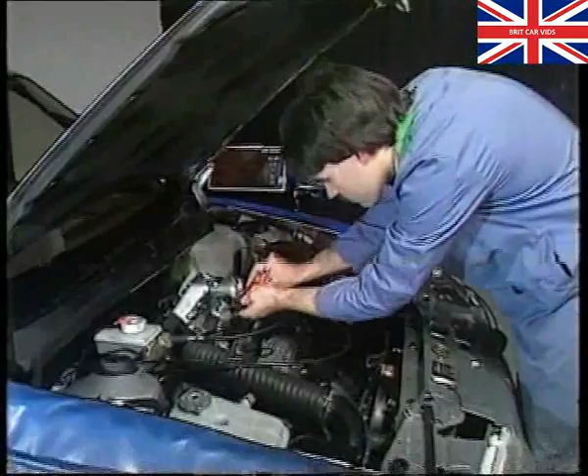For an orchestra to give an outstanding performance, each musical instrument must be tuned to perfection. A technician working with an engine must give the same care and attention to each individual component. Only when every part is precisely in tune can they combine to strike the right chord for a perfect performance.

Performance is important in any car, but even more so for turbos. Turbocharging gives the ideal balance, performance plus economy. It increases power without the additional cost or weight of a larger engine. Racing cars as far back as the 1920s used superchargers, from which the turbocharger has evolved.

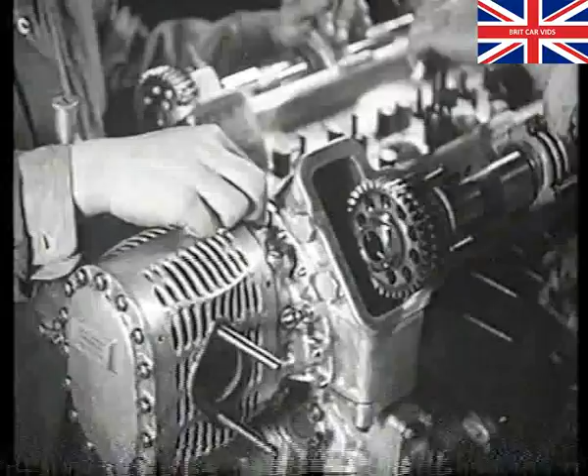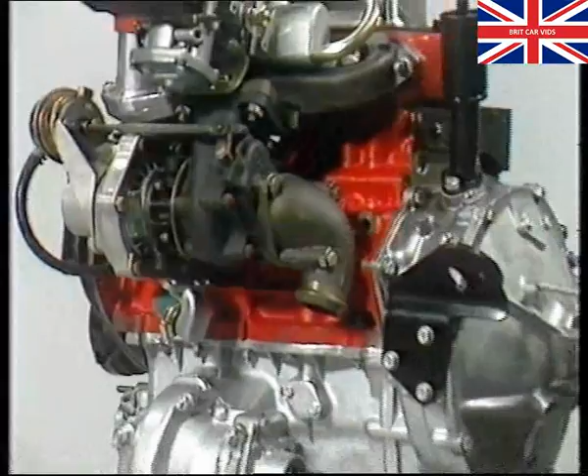Superchargers improve performance by blowing the air-fuel mixture into the cylinders and are usually belt-driven from the crankshaft. However, they have one major disadvantage. They absorb power from the engine to drive them. Modern turbochargers perform a similar function, but have the advantage of being driven by the waste exhaust gases. So the turbocharger is effectively providing more engine power without demanding any in return.

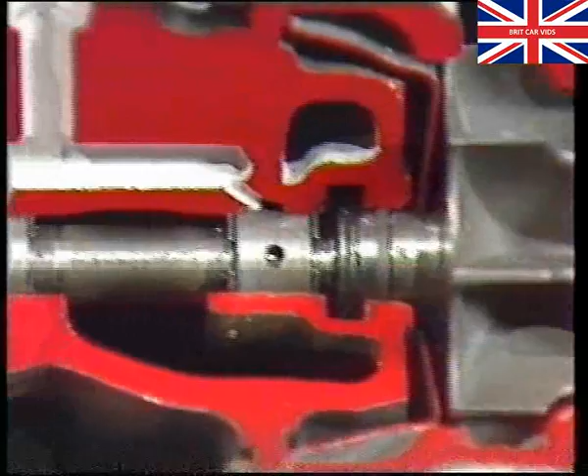The turbocharger is bolted to the exhaust manifold. At its heart is the shaft assembly. This has a turbine wheel on one end and a compressor wheel on the other. The shaft assembly is enclosed in a body which comprises a turbine housing, a bearing or center housing, and a compressor housing.

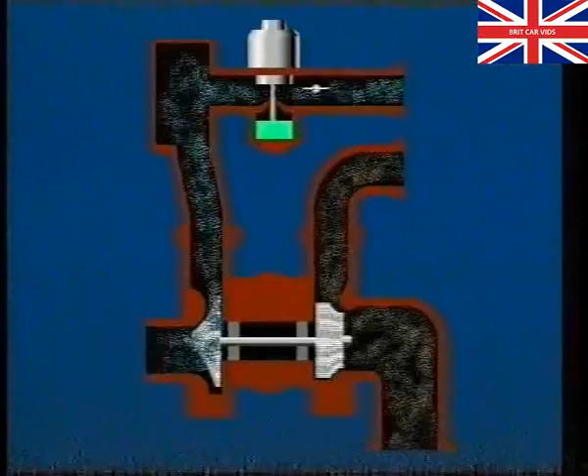Exhaust gases enter the turbine housing from the manifold, powering the turbine, which spins the compressor wheel. This draws air from the filter and blows it under pressure through the carburetor and into the engine. As engine speed increases, the turbine spins faster, increasing pressure. The higher the pressure, the quicker the cylinder is filled, producing more power. This compression of intake air is known as boost pressure.

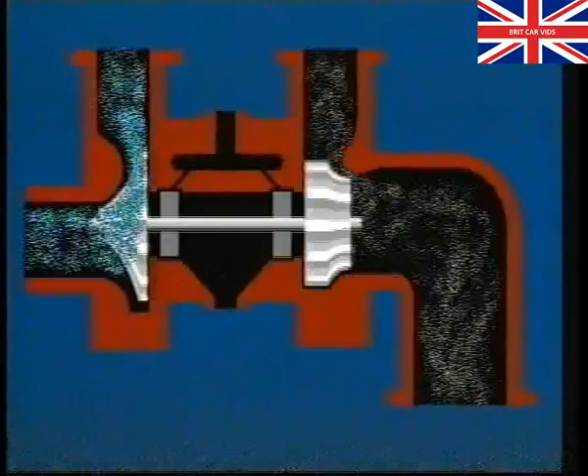A high volume of oil is fed from the engine lubrication system to the center housing, then through drilled passages to the bearings. An adequate supply is essential, as the shaft assembly can rotate at up to 130,000 revs per minute. If the oil supply was to fail, the result would be immediate overheating, which would destroy the remaining oil and result in bearing failure.

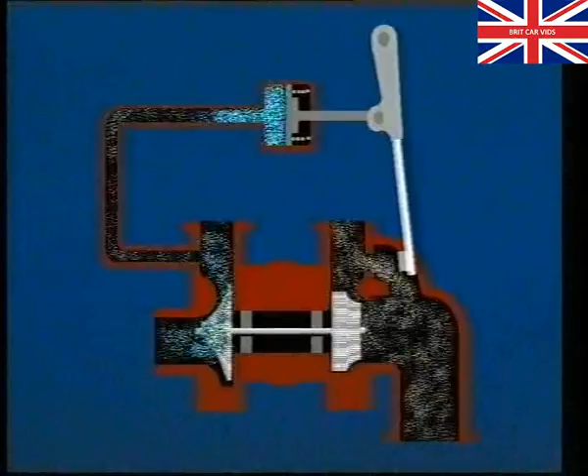A wastegate, which acts as a safety valve, is operated by a diaphragm and pushrod. This controls maximum boost pressure, which could otherwise damage the engine through over-revving. When boost pressure reaches a predetermined value, it will act on the diaphragm, opening the wastegate via the pushrod. This allows the exhaust gases to bypass the turbine and reduces boost pressure.

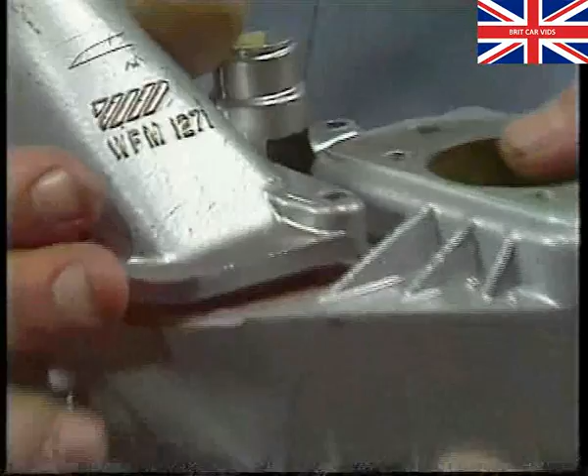If the wastegate valve is jammed shut, a relief valve in the plenum chamber will dump the excess pressure to atmosphere, preventing damage to the engine. On the Montego turbo, boost pressure is limited to 10 pounds per square inch by a purely mechanical wastegate. The Metro turbo has basically the same wastegate operation, but incorporates an electronic control system.

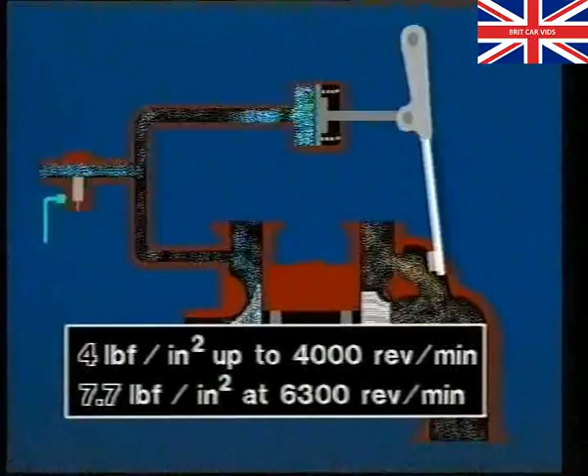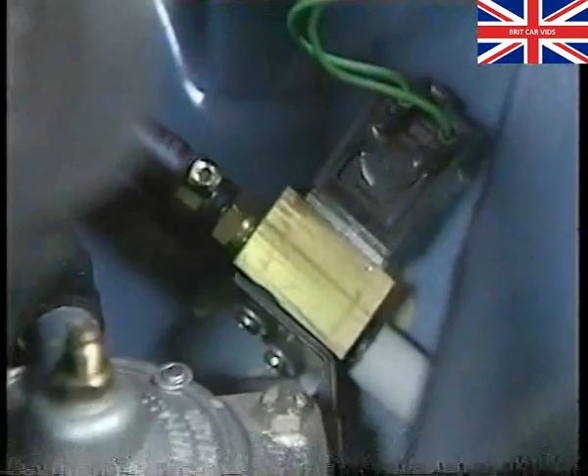A solenoid valve, controlled by an ECU, limits boost pressure to 4 pounds per square inch up to 4,000 revs per minute, increasing to 7.7 pounds per square inch at 6,300 revs per minute. This valve, mounted on the left-hand side of the bulkhead, regulates turbo boost by reducing the amount of boost pressure acting on the wastegate diaphragm.

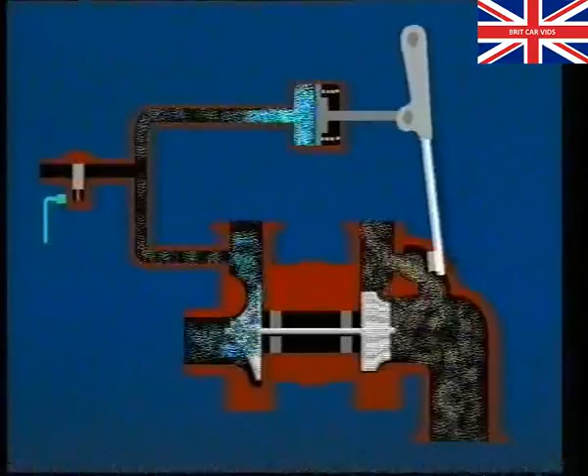The valve can open and close up to 12 times a second, depending on engine speed. If the electrical supply fails, the valve will remain closed, limiting boost pressure to 4 pounds per square inch. Because boost pressure rather than vacuum can be present in the inlet manifold, the crankcase ventilation system is unique.

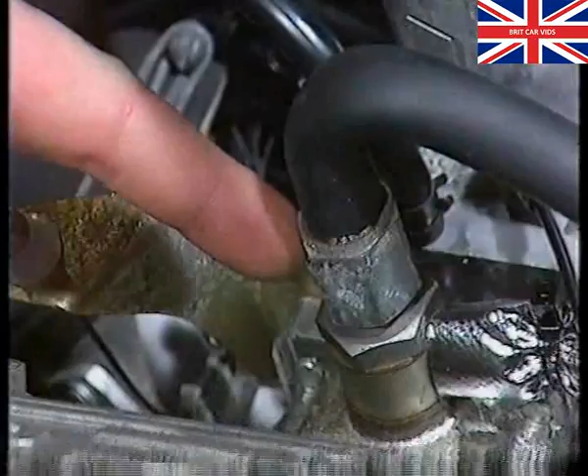Ventilation is dependent on two valves, one in the inlet manifold and one in the breather hoses between the engine and air filter. During overrun, or at idle, when inlet manifold depression is high, crankcase fumes are drawn through both these valves. As engine speed increases, boost pressure closes the manifold valve to prevent the crankcase being pressurized. The fumes are then drawn in through the regulator valve and nozzle, located in the base of the air cleaner.

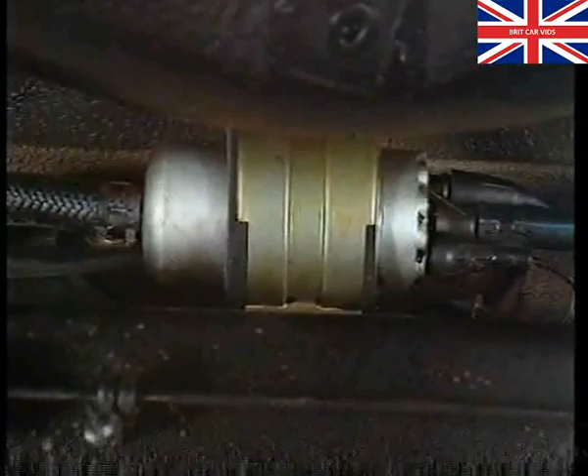The fuel systems fitted to both the Maestro and Montego are of the high-pressure recirculating type. During cranking, the fuel pump receives power from the starter solenoid. Whilst the engine is running, the pump is fed current via the oil pressure switch. If the oil pressure drops or the engine should stall, the fuel pump will switch off.

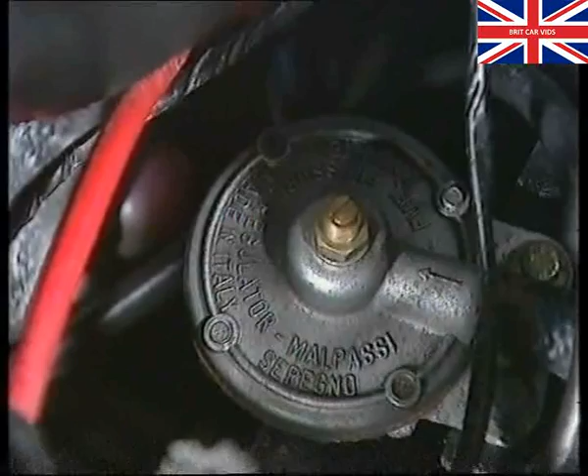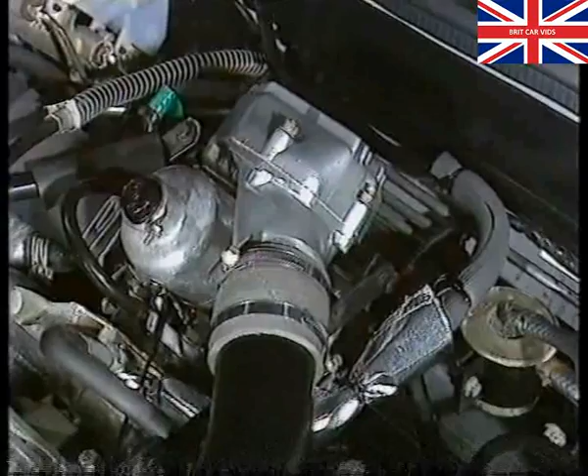Fuel pressure is controlled by a regulator. This is influenced by a sensing hose connected to the plenum chamber. As turbo boost pressure rises, fuel pressure will also rise, to ensure it's always 4 pounds per square inch above boost pressure. This means fuel can enter the pressurized float chamber at all times.

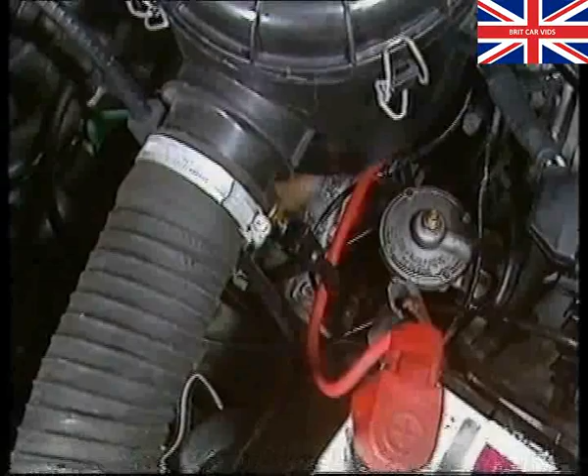Pressure regulators are preset at the factory via this adjusting screw, which must not be tampered with. A wrongly adjusted regulator can upset the fine balance between fuel line and float chamber pressure.

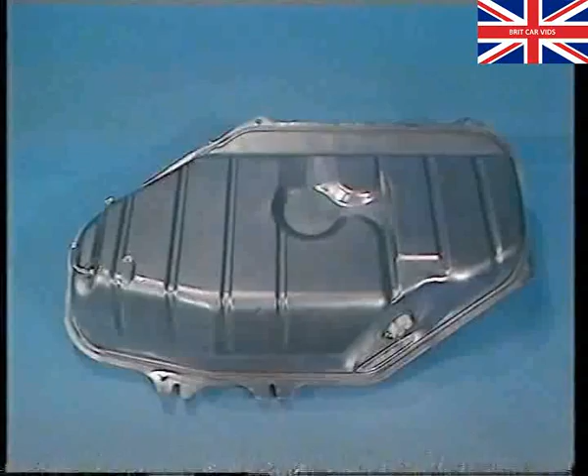In the Montego fuel system, the fuel tank contains a swirl pot. Inside this is the fuel pipe pickup strainer. The action of the swirl pot prevents air entering the fuel lines when the fuel tank levels are low.

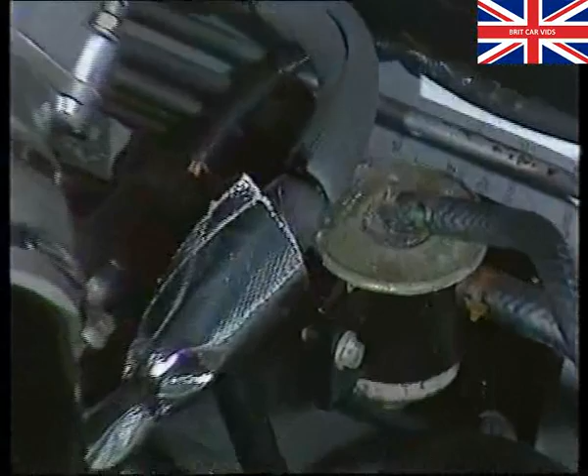A vapor separator on the bulkhead prevents aerated fuel entering the carburetor by means of a fine gauze filter. The air-free fuel then flows via the top outlet to the carburetor. Any aerated fuel is directed through the bottom outlet to the pressure regulator and back to the tank.

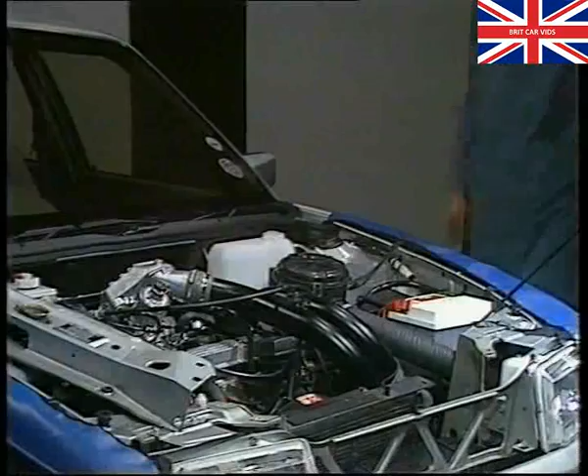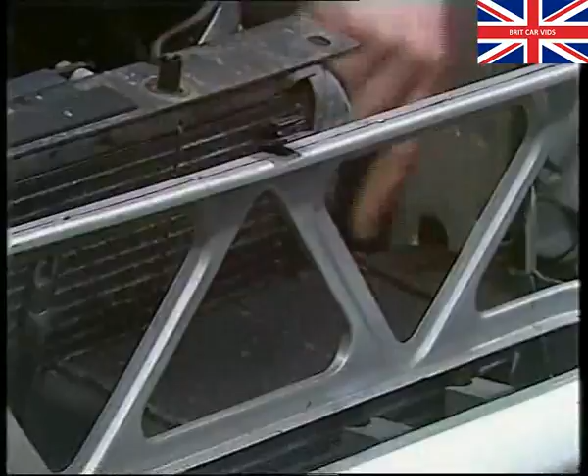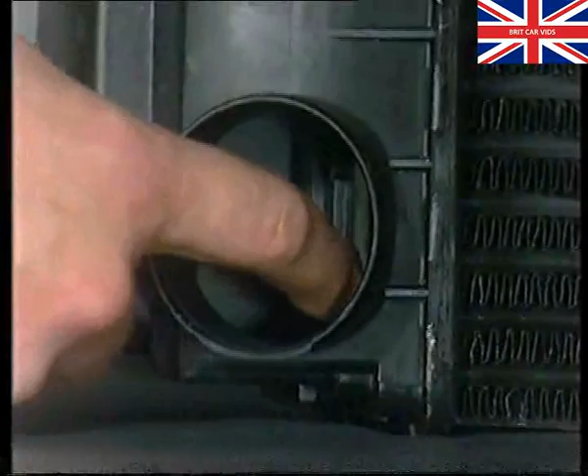The Montego turbo has an intercooler to cool the air after leaving the turbocharger and before entering the engine. This increases the density of the air. When intake air temperature rises above 45 degrees Celsius, a spring-assisted flap in the intercooler is opened by the waxstat, routing the air through the intercooler to the engine.

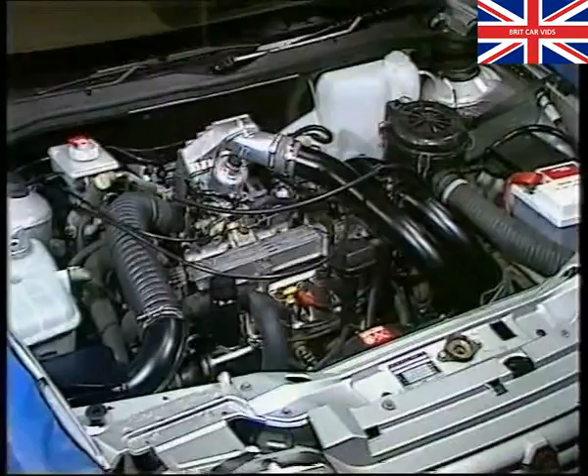To assist hot starting, the Montego turbo has a carburetor cooling fan, operated by a thermostatic switch in the thermostat housing. When coolant temperature is above 70 degrees Celsius and the ignition off, the fan blows air round the float chamber for 12 to 15 minutes, cooling the fuel.

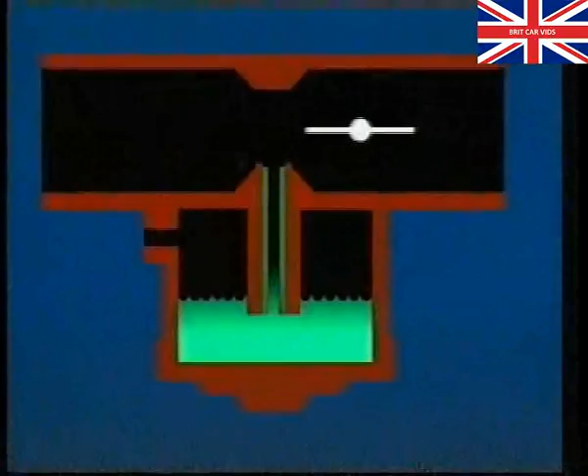A carburetor works on the principle that pressure within the float chamber is higher than that in the venturi, whilst the engine is running. This allows fuel to be drawn from the float chamber into the engine. With turbo carburetors, the same rule must also apply. It's for this reason that the float chamber is also open to turbo boost pressure. The venturi effect means that air pressure around the jet orifice is always lower than the float chamber.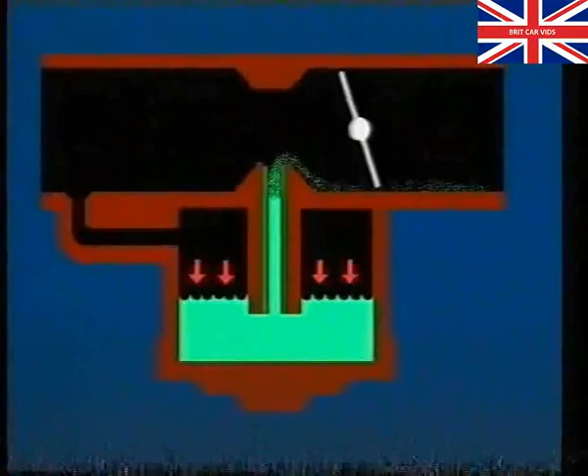Pressurizing the float chamber, however, does have its problems. When the engine is switched off, a pressure difference may still exist for a short time between the float chamber and the venturi, allowing fuel to enter the manifold and affect hot starting. To prevent this happening, the float chamber is vented to atmosphere by this solenoid-operated vent valve when the engine is switched off.

Maestro and Montego turbos are not only powerful, they're also economical. Fuel economy is achieved by weakening the air-fuel mixture during cruise conditions. The system, called a part-load weakener, consists of a small passage between the float chamber and the depression present in the carburetor during part throttle. The consequent reduction in float chamber pressure reduces fuel delivery.

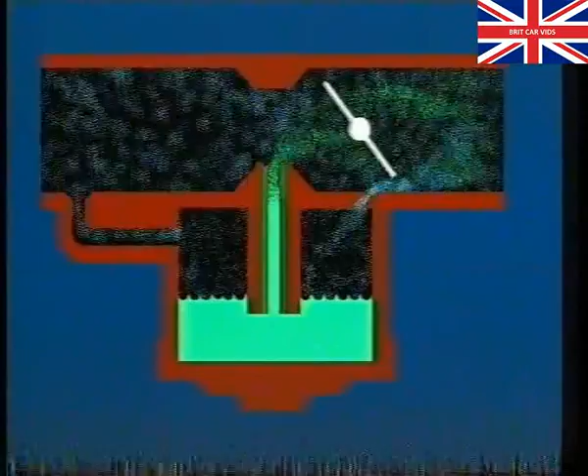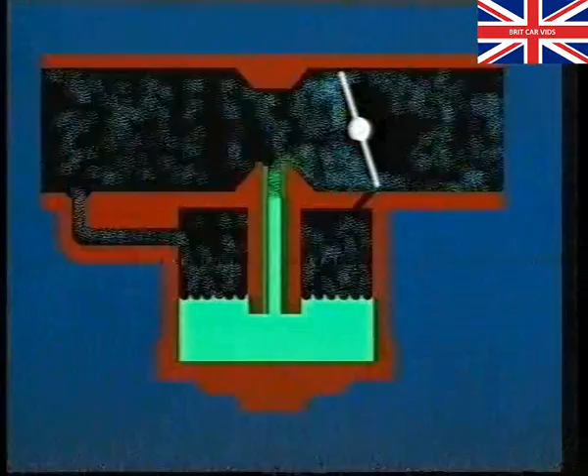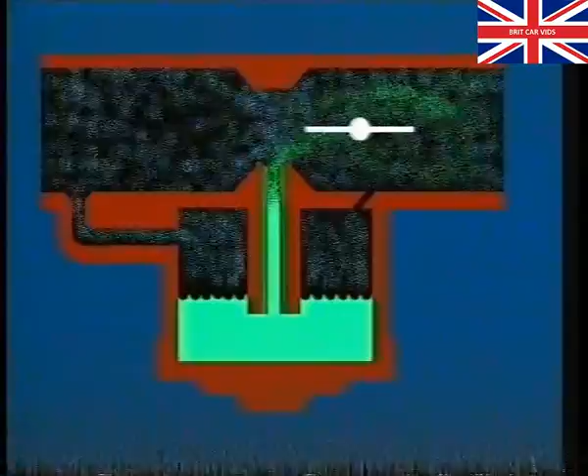A restrictor ensures that float chamber pressure isn't reduced to the stage where misfire occurs. Fuel delivery isn't affected at idle because the drilling into the carburetor falls on the plenum side of the throttle disc. At full throttle, depression on the carburetor isn't sufficient to influence float chamber pressure through the weakener. This simple system allows maximum weakening of the mixture when cruising without loss of performance or drivability.

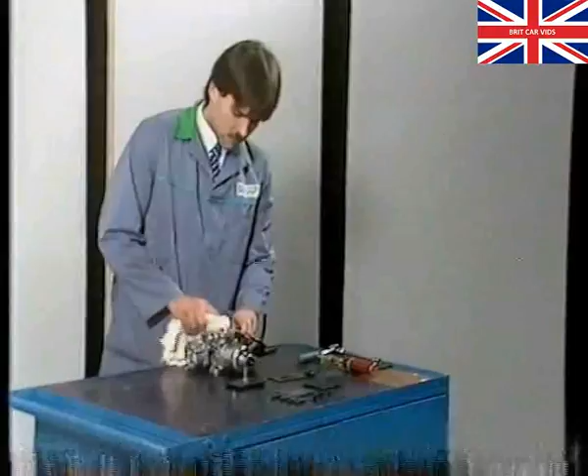A turbo carburetor has a damper clamp together with O-ring seals around the throttle spindle and suction chamber to prevent leakage of boost pressure. It's very important that whenever the carburetor has been dismantled, it's retested using test equipment 18G 1462 to ensure it remains airtight.

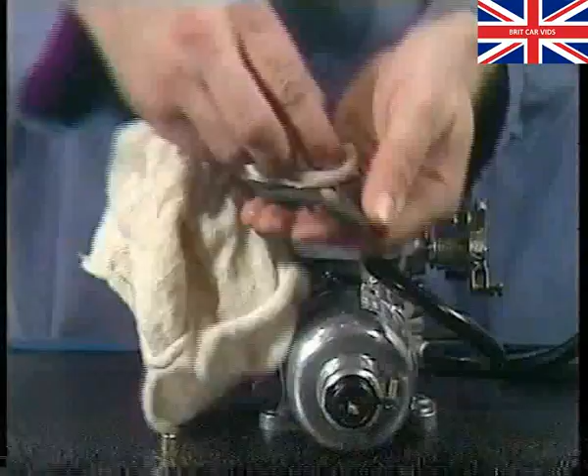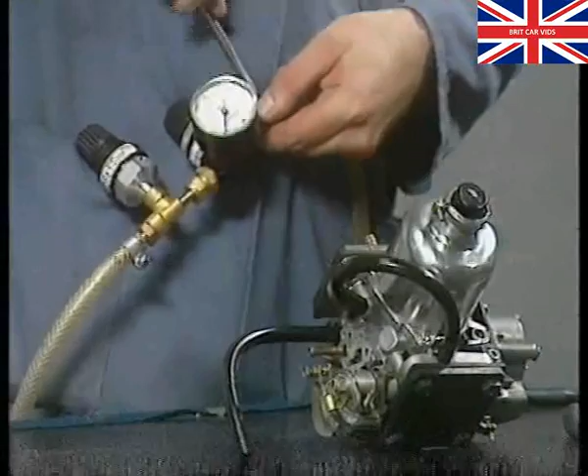Clean the mating faces of the carburetor and blanking plate gaskets. Secure the blanking plates, complete with gaskets, to the carburetor. Then seal all remaining vents to the carburetor. Using clips, attach one end of the regulator valve to an air supply. The other end should be attached to the carburetor blanking plate. Turn on the air. Submerge the carburetor in a bowl of water and check for signs of air leakage.

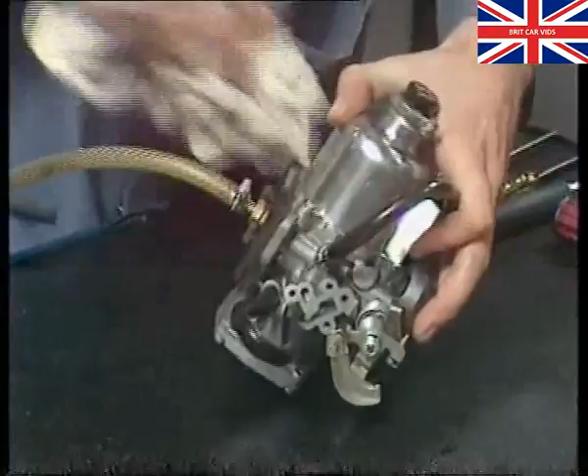Renew any gaskets or seals which leak, then retest. Dry the carburetor with a cloth and ensure the piston damper cap and its clamp are firmly secured.

Correct tuning is essential. Care and attention at this stage is the only way to achieve peak performance. A turbo driver demands performance from his car, and tuning the carburetor is probably the most important task of all.

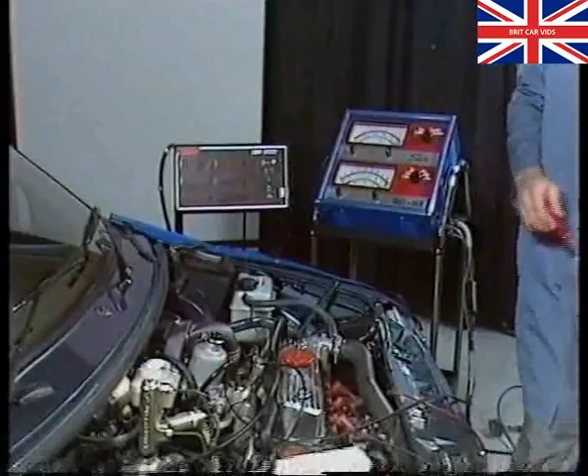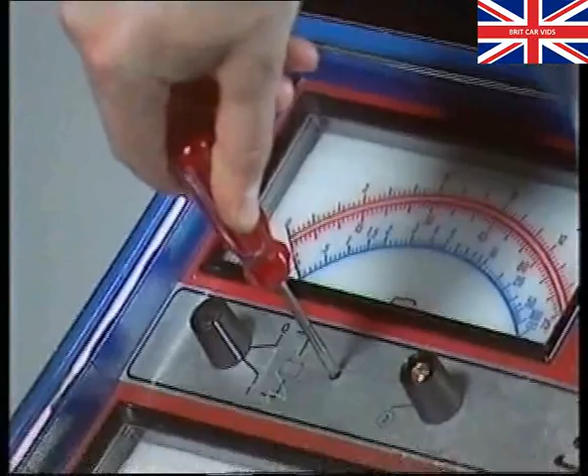Make sure that engine tuning equipment is properly maintained, calibrated, and used correctly. The tuning procedure on a turbo carburetor is the same as conventional carburetors. The engine must be in good mechanical condition, and the valve clearances, ignition system, and timing must be correct.

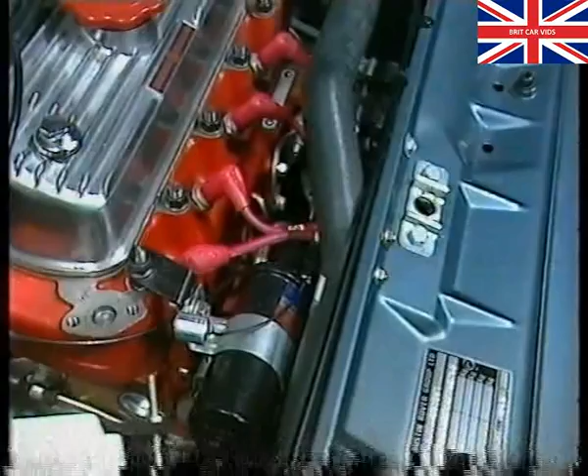Check that there are no air leaks in the manifolds or malfunctions with the carburetor vent valve. Make sure the air filter is clean and all vacuum, pressure, and intake hoses are secure and free from kinks or splits. Switch off all electrical loads. Remove the damper, top up with engine oil, and secure the clamp.

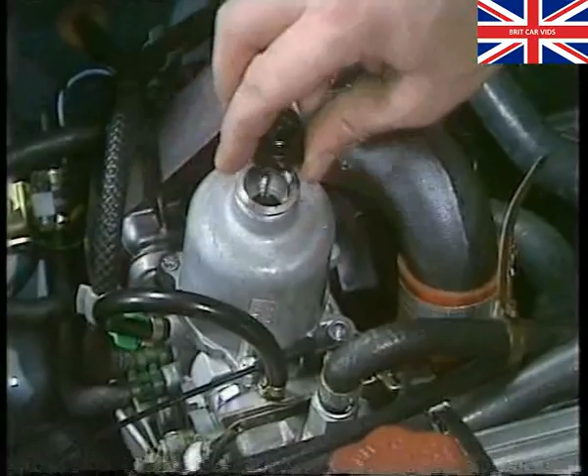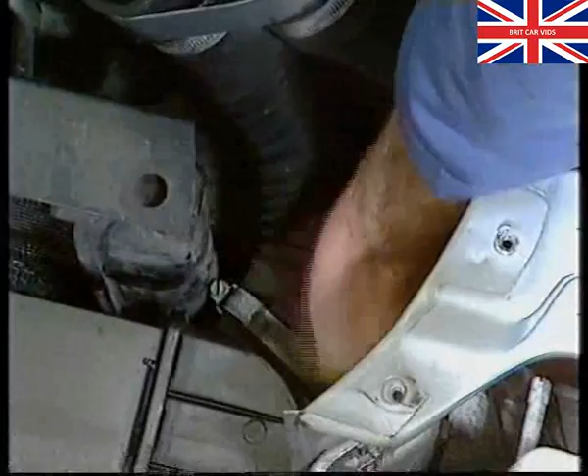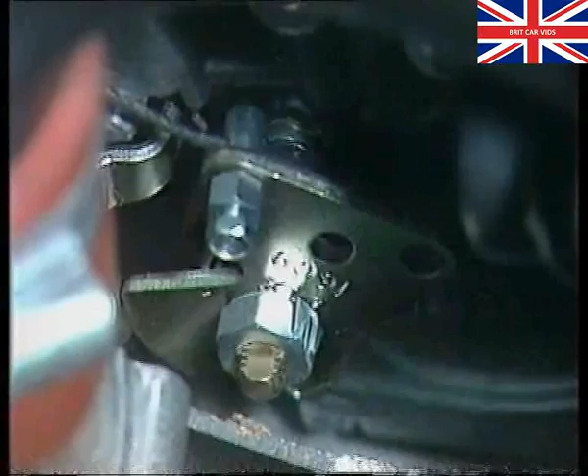Check for full throttle opening and the correct free play on the cable. Don't forget to check the intercooler hoses on the Montego, as air leaks here will reduce power. Also on the Montego, there must be a clearance between the fast idle screw and the stepper motor push rod. On Metro, ensure the choke control cable returns fully and has some free movement.

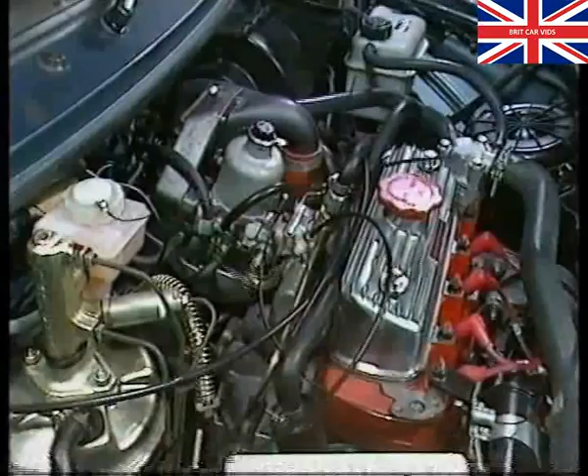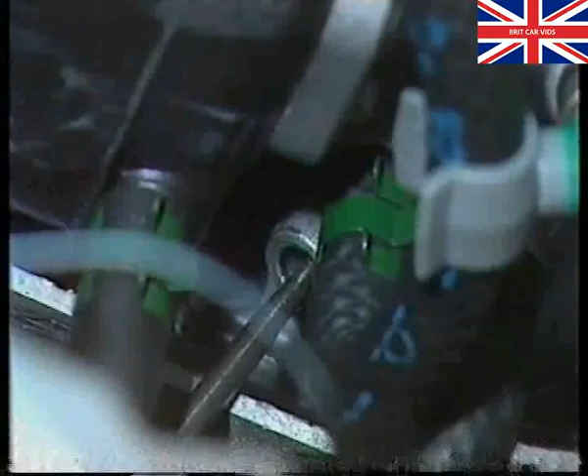Before beginning tuning, carry out a short road test to ensure the engine oil and coolant are at normal operating temperature. Start the engine and allow the idle speed to stabilize. Adjust as necessary. If the engine doesn't run smoothly at idle, adjust the mixture setting by turning the screw, clockwise to enrich, anti-clockwise to weaken, until the fastest engine speed is obtained.

Now turn the same screw anti-clockwise until the engine speed starts to fall. Then reset the idle speed. Remember on Montego, when setting idle speed, to adjust from a high value to the specified speed. Otherwise, the engine management system will attempt to maintain an idle speed by operating the stepper motor whenever the speed falls below a certain level.

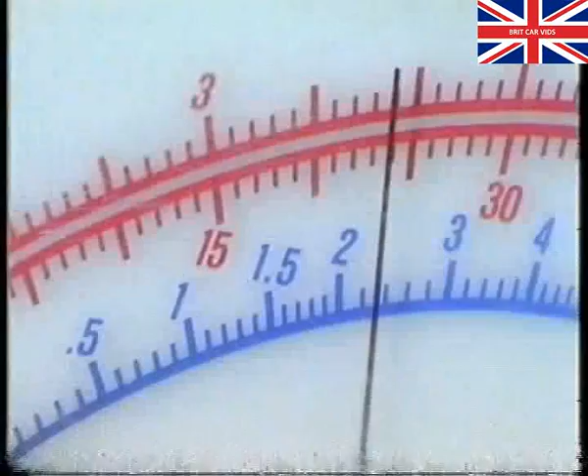If adjustments are not completed within 3 minutes, fuel may build up in the inlet manifold, affecting readings. Increase the revs to 2,500 for 30 seconds to clear the system. Using the exhaust gas analyzer, reset the mixture adjusting screw to obtain the specified CO level.

On Montego, disconnect the coolant thermistor multiplug. When the ECU senses open circuit at the plug, it will index the stepper motor to a fast idle condition, without providing enrichment through the rotary choke. Start the engine and check the fast idle speed. Adjust if necessary. Switch off the engine and reconnect the coolant sensor.

Road test the vehicle to ensure performance and idle are satisfactory. This is always a good cross-check, and remember, this is a test the owner will do. An orchestra can only give its best performance if the conductor understands the part played by each individual musician.

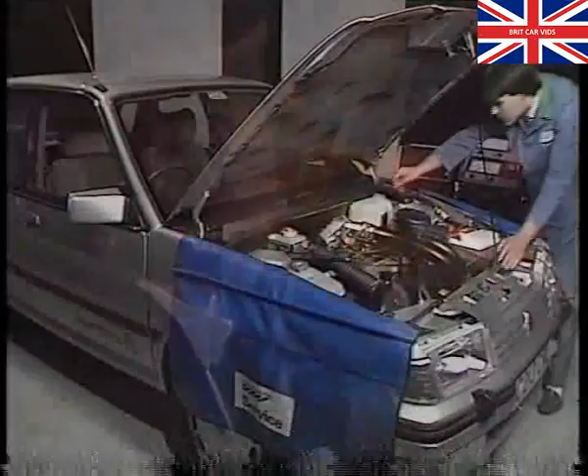In much the same way, a mechanic must understand the part played by each individual component of an engine. The most important factor during fault finding is to tackle it in a logical and disciplined way. On the fuel system, if fuel starvation is suspected, check fuel hoses for damage or kinks. And on Metro, don't forget the fuel line filter.

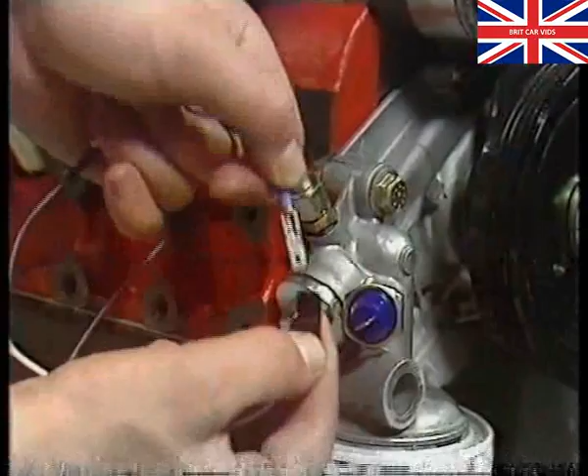To check the fuel pump, disconnect the fuel hose and attach pressure gauge 18G 1500. Also, disconnect the wire to the oil pressure switch and earth it. Turn on the ignition and note the fuel pressure, which should be approximately 4 pounds per square inch. Don't forget to check the fuel cut-off inertia switch on Montego. If all these are working correctly, check the fuel pump relay.

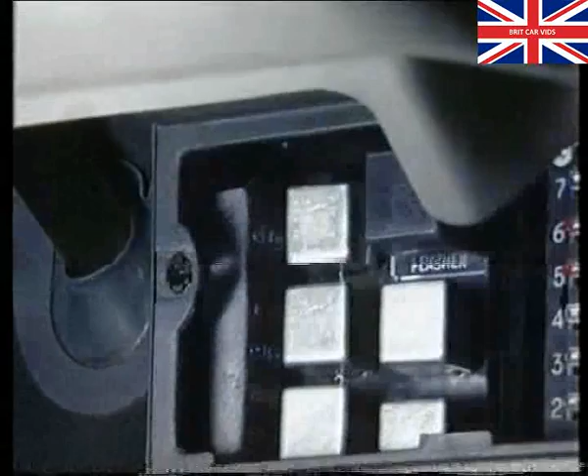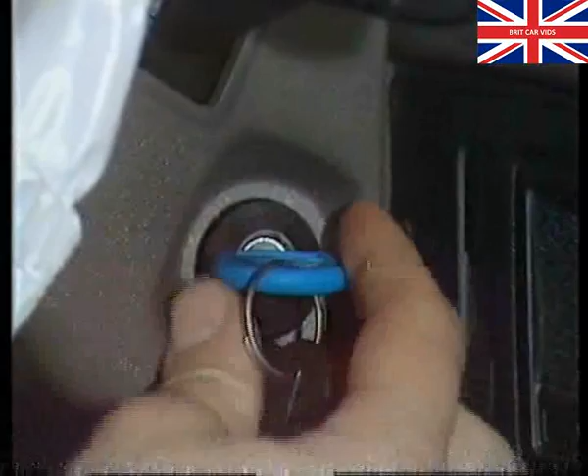Disconnect the relay from the multiplug and bridge the terminals 85 and 30/31. Switch on the ignition. If the fuel pressure is now correct, the relay is faulty and must be renewed. If there's still no fuel pressure, either the fuel pump is faulty or the fuel line is blocked.

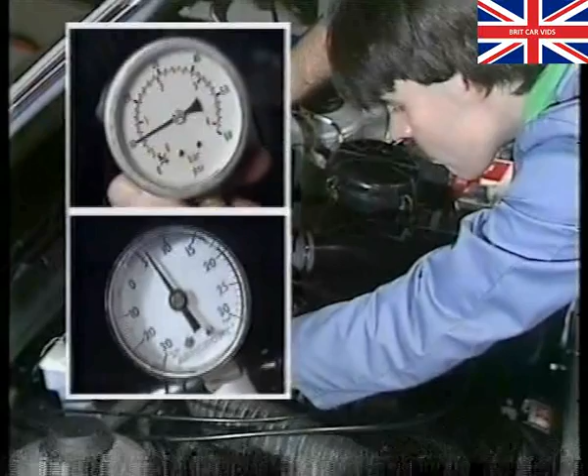To check the fuel pressure regulator, disconnect the air pressure sensing hose from the plenum chamber and attach a Mityvac pump. Apply air pressure with the Mityvac and note the reading on the fuel pressure gauge. Remember, the fuel pressure should always be 4 pounds per square inch more than the air pressure applied to the regulator. If there's no increase in fuel pressure, it's the regulator that's faulty.

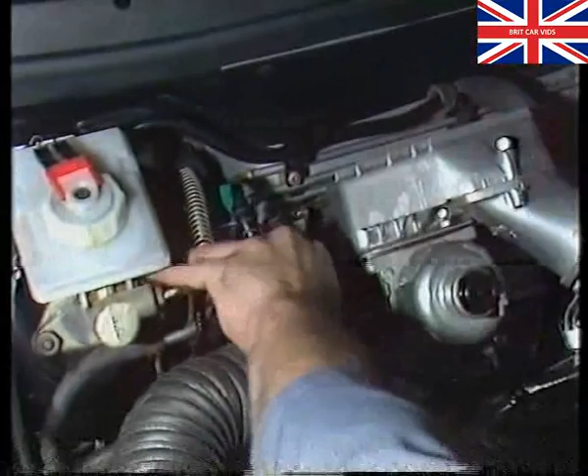A faulty carburetor vent valve may leak float chamber pressure to atmosphere, causing fuel starvation. This means the engine will run happily at idle, but not under load. To check this valve, simply disconnect the vent hose from the carburetor and apply a regulated air pressure to the valve with the Mityvac.

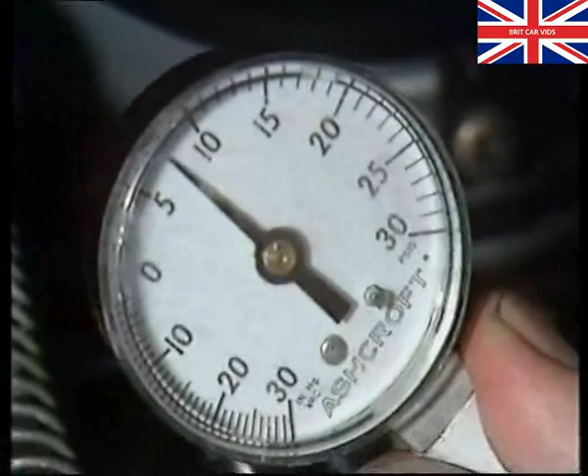If the valve doesn't hold pressure, check the electrical supply to the valve and its fuse. If the supply is okay, then the valve is faulty and should be replaced. A turbo requires very little maintenance other than periodic visual checks of its housing and fittings.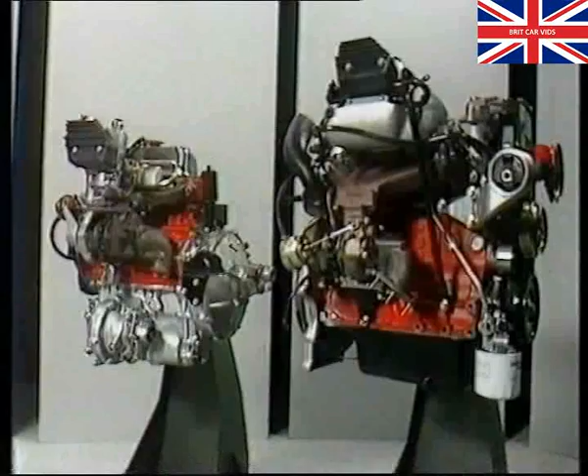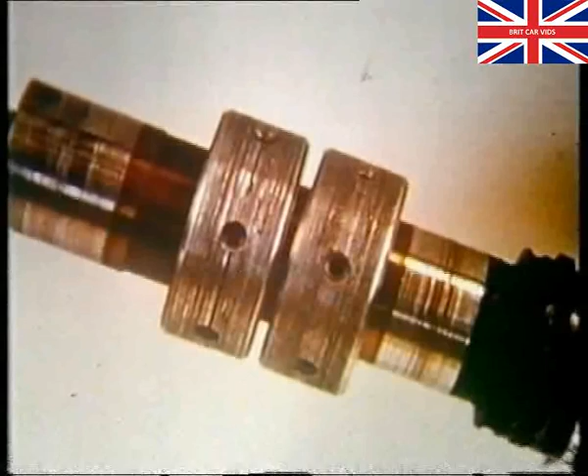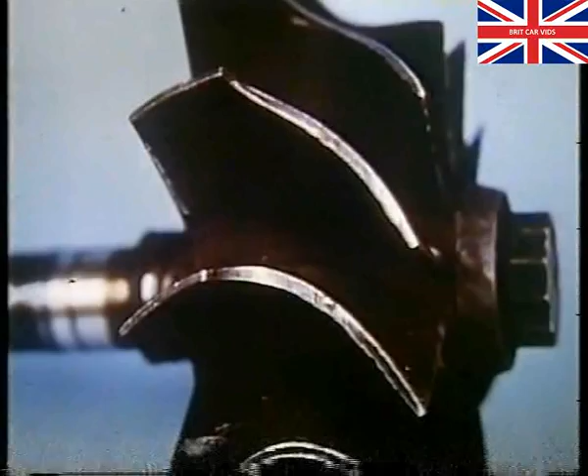Turbo failures are usually caused by one of the three turbo killers: lack of lubricant, contamination of oil, intake of debris. Lack of lubricant flowing through the oil galleries will cause bearing failure, leading to turbine and compressor wheel rub. Contaminated oil will score shaft journals and bearings and block up the oilways, causing major oil leakage. Objects drawn into the turbocharger will damage the blades on the turbine and compressor wheels. This distortion causes imbalance in their rotation.

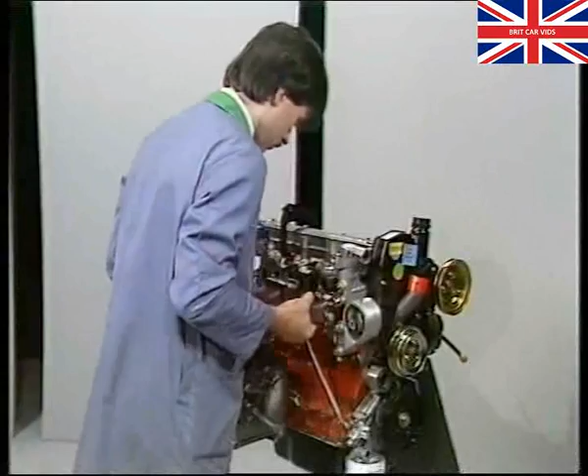But turbos can be removed needlessly through incorrect fault diagnosis. Common symptoms of possible turbo faults are that either: 1. The engine lacks power, 2. Black smoke is emitted from the exhaust, 3. Blue smoke is emitted together with high oil consumption, or 4. The turbo is noisy when operating.

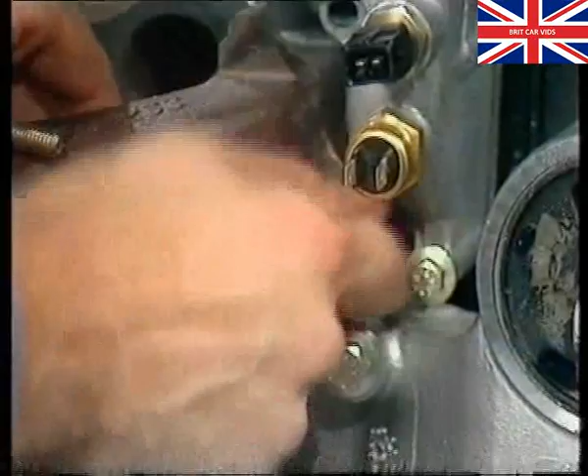Lack of power and evidence of black smoke can mean there's not enough air reaching the carburetor intake. So check the air filter and intake hoses for restrictions, and check for air leaks on the inlet and exhaust manifolds. If any of these faults occur, the sound of the turbo can change quite noticeably when under load.

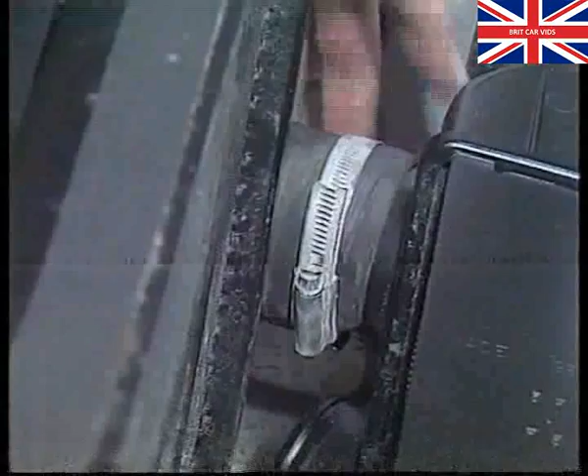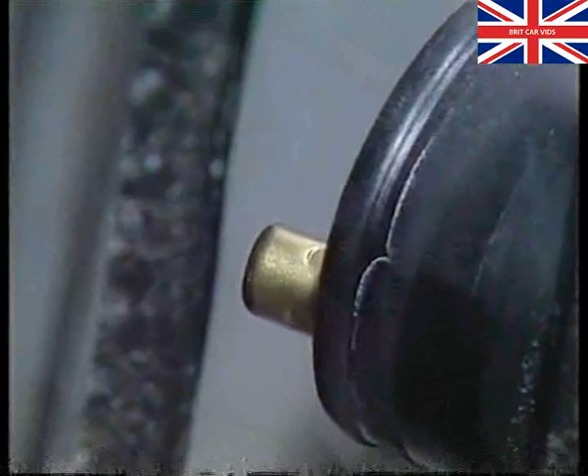Lack of power on the Montego turbo can be caused by failure of the thermostat in the intercooler. This will allow excessively hot air to blow into the cylinders, which in turn will cause detonation. The knock sensor will detect the detonation and fully retard the ignition timing, causing lack of power.

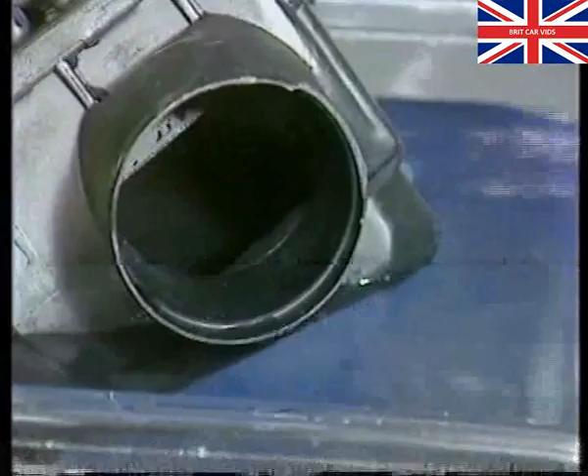To test the thermostat, remove the bottom hose from the intercooler and see if you can move the flap by hand. If it moves, but its operation is still suspect, remove the intercooler to check the thermostat. Simply immerse the thermostat under water at 55 degrees Celsius and hold it there. If there's no movement, the intercooler is faulty and will have to be replaced.

One thing to remember: never run the engine with the turbo intake hoses removed, as debris will be drawn into the compressor housing and damage the compressor blades. Check the compressor blades for damage and ensure that the shaft assembly rotates freely.

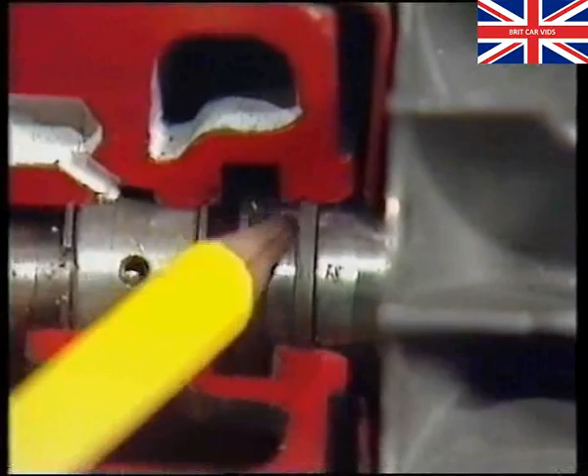An oil leak through the shaft seals in the turbo or a malfunction in the engine may result in blue smoke. If there's no excess movement in the shaft and the shaft runs freely, check that the turbo oil drain, located behind the heat shield, isn't blocked. Finally, check for excessive crankcase pressure. Ensure that both non-return valves are working correctly and that the engine breather hoses aren't kinked or blocked.

If none of these symptoms are present, the lack of power is not caused by the turbo, so examine the engine for faults. If the turbo is faulty, replace it, and after installation, always prime the lubrication system before starting the engine.

So, to recap, tuning operations on turbocharged engines remain much the same as their normally aspirated counterparts. But it's even more important to check for air leaks in the intake system, especially on the carburetor itself. Also, considering the high rotational speeds of the turboshaft assembly, it's essential to have an adequate supply of clean oil.

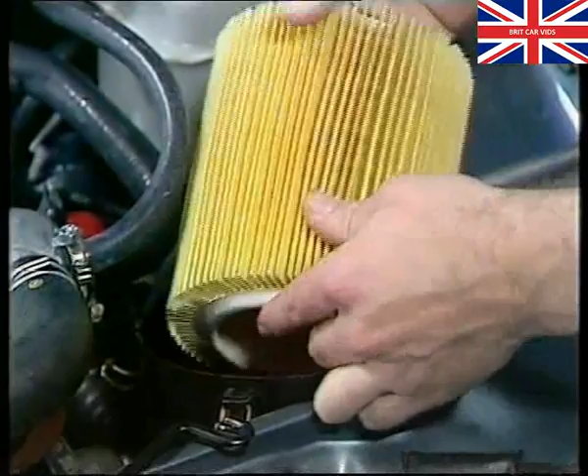Anything that changes the prominence or pitch of the turbo whistle should be investigated. Air leaks in the system or a contaminated air filter are the usual causes. The replacement of a turbocharger in any event should be your last line of action, after every other cause has been investigated.

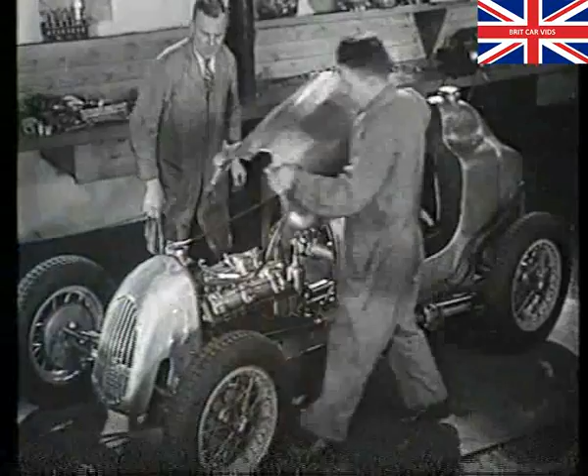Improving performance has been the ambition of the British car industry since the dawn of motoring. The translation of that ideal into reality has spanned generations of dedicated engineering. The turbocharger owes its parentage to the superchargers of yesteryear and now powers today's supercars, bringing turbo power, performance and economy to the Maestro and Montego range.

But any performance is only as good as the tuning of the instrument. The customer demands excellence, and with your expert fault diagnosis and tuning, you can give him the power, economy and performance he expects.